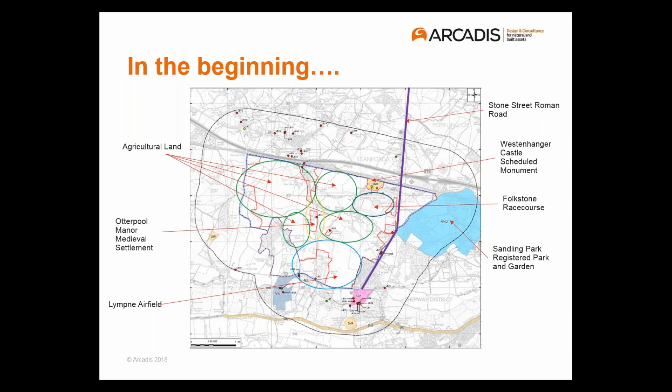So at the early stages of the project, one of our key aims was to reduce the risk of the project from the archaeological resource. But we also knew that the archaeological resource at this site had huge potential to add value to the project. From the outset, we knew that archaeology was going to be a major part of the master planning and design of the site and would be a key topic in the planning application.

The development was going to interact with some nationally significant heritage assets, such as the castle, and we also knew that there was a lot of potential for large amounts of as yet undiscovered archaeology to be present. All of these factors meant that there were both risks and opportunities from archaeology on this project, which presented both constraints to development, but also opportunities to add value to the project.

Some of the key risks and opportunities could be dealt with through design. However, the unknown archaeological potential could have posed a significant risk during the construction phase due to the potential lack of clarity around cost and programme that dealing with unknown quantities of archaeology can present. So as you can see from this slide, I've just pulled out some of the key risks and opportunities that we were talking about at the initial stages of the assessment.

Many of them were obviously associated around the castle, but we also had design risk associated with Lympne airfield and how much of the airfield would be available for development. We had a UXO risk there, significant amounts of unexploded ordnance in the area. Folkestone Racecourse, there was much discussion around whether it was even a heritage asset or modern disturbance, with differences of opinions. And obviously the unknown archaeology I've mentioned.

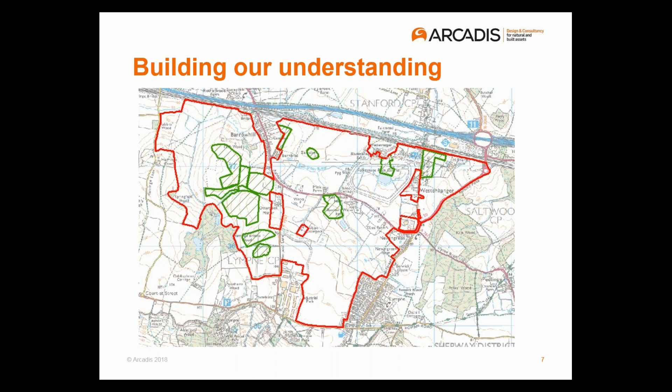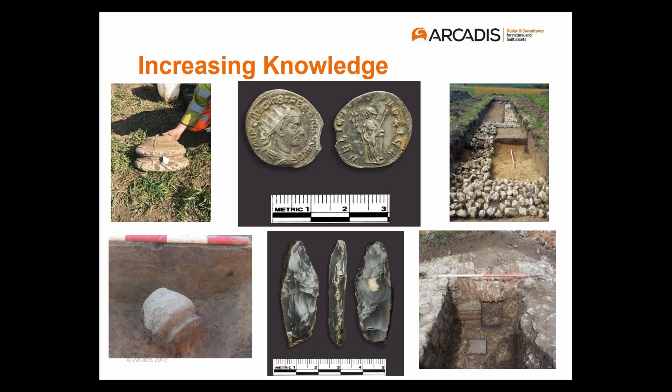So what have we found from the investigation so far? We found that the site was a rich historic landscape containing previously unknown archaeological remains. We have Mesolithic and Neolithic remains, including a possible causewayed enclosure. We have Bronze Age field systems. We have an early to mid Bronze Age barrow cemetery. We have early to late Iron Age enclosures and pits. We have late Iron Age and Roman field systems. We have a Roman villa with hypocausts, trackways, a possible malting oven, and evidence of glass furnacing. We have Roman farmsteads, part of the formal Tudor gardens to the castle, and a large number of landscape features associated with the castle, including the former deer park. We were actually able to trace the line of the park pale through historic mapping and LiDAR.

At this point, I just want to briefly touch on one of the feature types we've identified through our assessment work: the prehistoric barrows. At the beginning of the project, we knew there was one or possibly two barrows within the site. However, through the various assessment and investigation works we've conducted, we've identified a large number of other barrows.

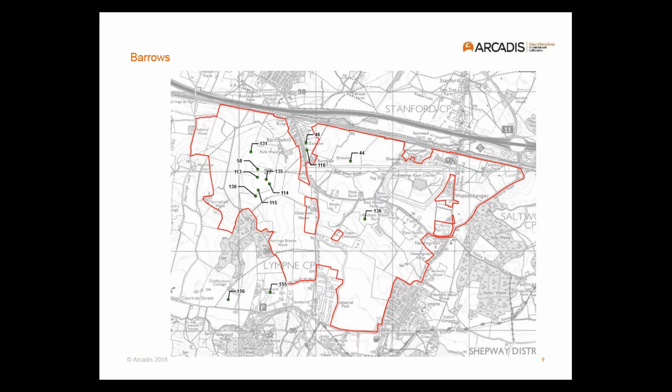This has significantly added to the understanding of the distribution of prehistoric funerary monuments in this part of Kent, but has also created potential further constraints for the Otterpool project. So a key focus of our work in relation to these archaeological features was to understand the preservation and significance of each barrow, so we could identify which ones needed to be preserved in situ and which ones could be mitigated by record.

So what have we done with all this information we've been collating? One of the ways we have added value to the project is by managing constraint through design. Here you can see some of the ways this has been done. The most significant of the prehistoric barrows have been preserved in situ.

We have maintained areas of open space around Otterpool Manor, which contains a small cluster of listed buildings and is also a former medieval settlement. We have retained some of the key airfield features, such as the Pickett Hamilton Fort and the pillboxes. We've placed areas of open space in the location of the villa, so we can preserve that in situ. The line of Stone Street Roman Road has been preserved and a new high street constructed to the west to divert traffic away from the line of the Roman road.

And we have incorporated a park into the master plan located just to the south of the castle, and more about that in a second. Understanding of this design mitigation and the drivers for it as the project moves forward into the construction phase will be important, as it may have implications for construction techniques in the preservation in situ areas.

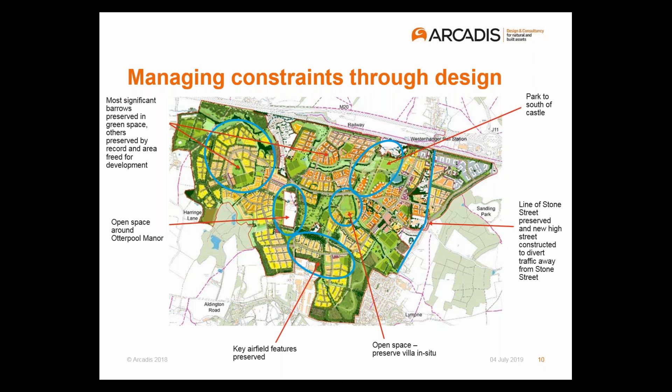One of the key topics that has featured through the life of the Otterpool Park project is Westenhanger Castle. Impacts from the development on the castle and risks to the project from the castle have been the focus of many discussions, and we've produced a number of detailed assessments focusing on understanding the significance of this asset and managing the risk in both directions, both to and from the project.

One key piece of design that has come out of our assessment sprang from the work we did on defining the setting of the castle and identifying previously lost features.

The area to the south of the castle, which has been agricultural land since the post-medieval period and then latterly occupied by Folkestone Racecourse, was identified through our work as being part of the former deer park associated with the castle. Our assessments were able to identify the former Park Pale, as I've previously mentioned, and also the lost formal Tudor gardens, which are located immediately to the south of the castle buildings. And we also rediscovered the southern access track to the castle.

Working with the design team, we've incorporated these features into the master plan. The area to the south of the castle will become a public park. There will be a new formal garden in the location of the Tudor Gardens, and the southern access track will be reinstated, which will reintroduce the original formal access to the castle.

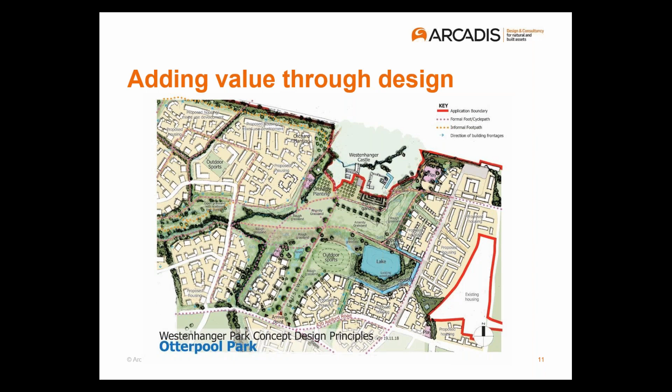So this project has shown what a rich landscape the Otterpool site is, with a long history of human activity, covers a large area and already has several distinct heritage identities within it. And through our work, we are working to reference that and to create a place that doesn't just feel dropped into the landscape, but references the past in a way that people can appreciate and engage with.

I've talked about the park by the castle, which will be a town park. There will be a new high street and town centres near the station, which are going to form part of several distinct neighbourhoods. Because the site will be built out in phases over 30 years, each neighbourhood needs to have its own distinct identity but still be interconnected.

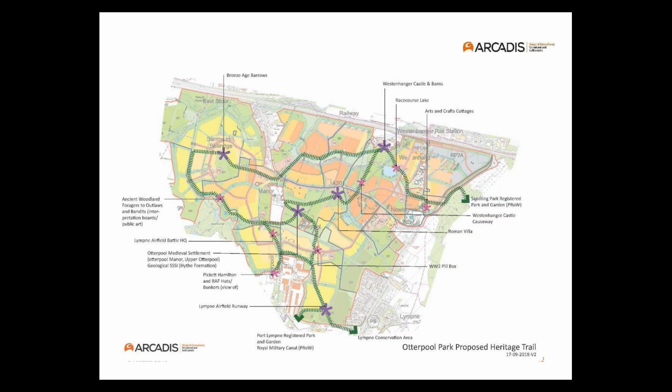Hopefully what I have demonstrated with this case study is the benefits of early assessment and investigation on a project. As I mentioned, we've been working on this project since 2016. We're currently in the stage of simultaneously submitting a planning application and continuing the archaeological trial trench evaluation.

Because of this early assessment investigation, we have been able to identify the most significant archaeology so it can be preserved in situ and incorporated into the design. We have achieved good clarity on the archaeological potential of the site, which means a clear mitigation strategy can be produced and used when letting construction contracts, hopefully fewer surprises at construction stage.

We have greater clarity on cost of the archaeological mitigation that's going to be required, and that gives us increased control over the programme as well. The archaeology is making a positive contribution to the master plan, creating a sense of place and community buy-in, and that increased understanding of the archaeological resource has led to more enhancement opportunities for the development, such as the formal gardens and the heritage trail.

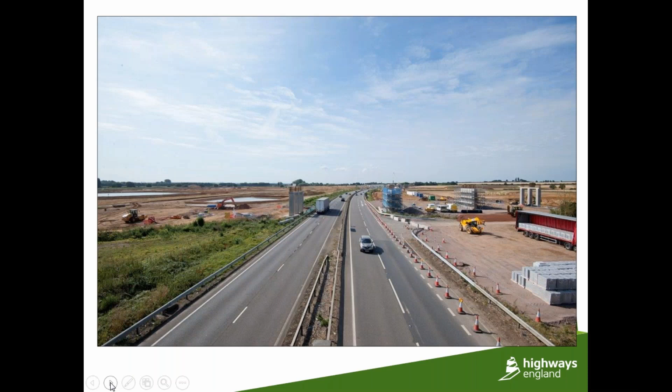There's a quick look at the road. I've not got any maps today, but yeah, if you know Cambridge to Huntingdon, this is the actual road. Very flat landscape, very wet. Now, one of our managers who probably had a bit of time on his hands worked out that actually we excavated the equivalent of 7 Vatican cities. So that gives you a bit of an idea of the scale of this project.

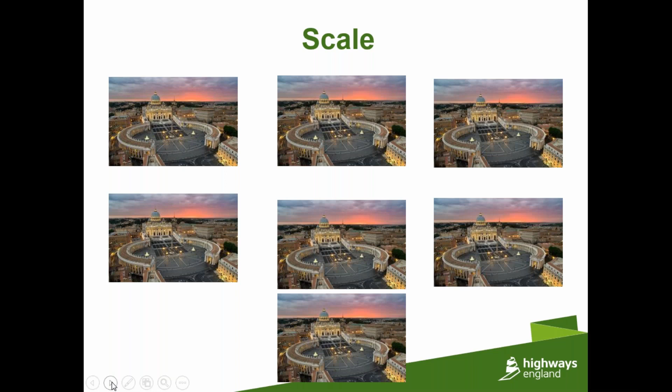I'm not going to go into detail on what we actually found. I'm going to concentrate more on the learnings, but we had everything. This was actually quite unusual - we don't usually pick up Paleolithic stuff, but we did on this. In fact, it was on the news quite a lot about woolly rhinoceroses and woolly mammoths. We had everything from that. Lots of henges, lots of barrows, as you'd probably expect. Lots of Roman and Iron Age, dozens and dozens of sites like this, with some Iron Age, some Roman, some both.

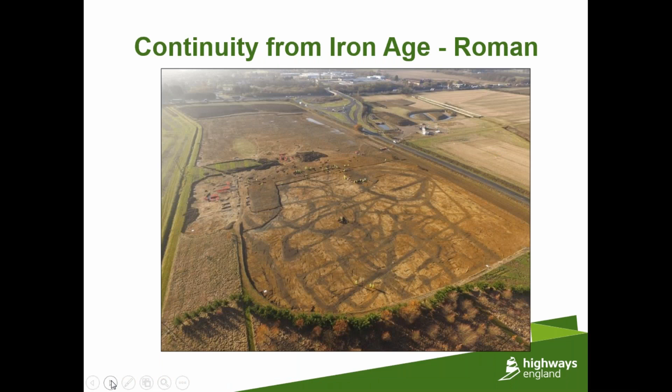Probably the biggest unexpected discovery in terms of what we actually found was the Saxon settlements. We found 2 or 3 Saxon settlements and a medieval deserted village, which didn't show up really in any geophysics or any trenching. So that was the biggest surprise of the whole lot.

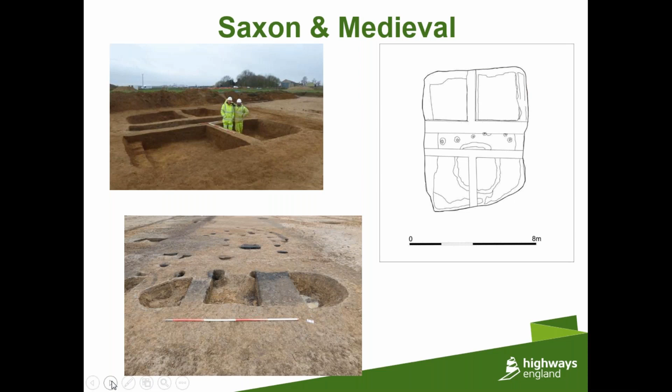Just to give you an idea of the scale, we investigated about 800 hectares in terms of geophysics and trenching, and ended up excavating about 28% of that - 228 hectares eventually fully excavated. You can see the scale of that: 65,000 person days, almost 5 years of watching machines.

We had about 40 sites in total. On average we had about 12 sites running at any one time, but at its peak we had 17 sites running in parallel. On average we probably had about 150 on site, but at its peak 250, with another 50 off site - so about 300 staff on the project. The largest single team on one site was 136 staff, and one of those sites ran for 83 weeks. So you can see the scale of the exercise.

In terms of data, these projects are massive on data. It's a real matter for projects like this to be managing that: 92,000 contexts, 1,600 plans, 15,000 sections, so you get a feel for how much data we're actually generating and producing. And 17,000 buckets of environmental samples, which we'll come on to later.

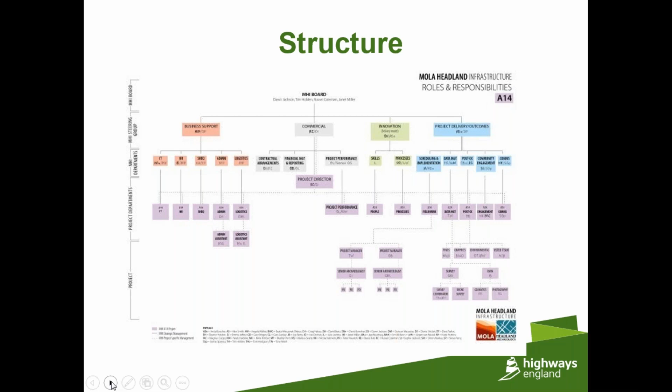A client, as I mentioned before, actually there were 4 different clients building 4 different roads, so that was an issue in itself, and joining it all up was quite a struggle. They eventually brought in Steve Sherlock, a consultant, to help with that, and he did a great job in helping us work with them.

There was no real program in those early days, only a 3-week look ahead. So again, very difficult to plan your resources when you really don't know what's happening other than 3 weeks ahead.

Another issue we had was the priorities on the scheme. The enabling works were very keen to get haul roads in, piling platforms and compounds. And that often meant part excavating sites, not in their entirety, because if we'd done the whole site, we would have fallen behind. So we ended up having to do parts of sites quite often in those early months.

And also as changing competing priorities, you had, was the priority the road line, or was it the haul roads, or was it the borrow pits, which are almost a bigger footprint than the road? Or was it the utility diversion? So often competing priorities had us moving from one to the other.

And really the client had never dealt with archaeology on this sort of scale. Often this sort of work is done before they get on. And so there was a real learning curve for them as well.

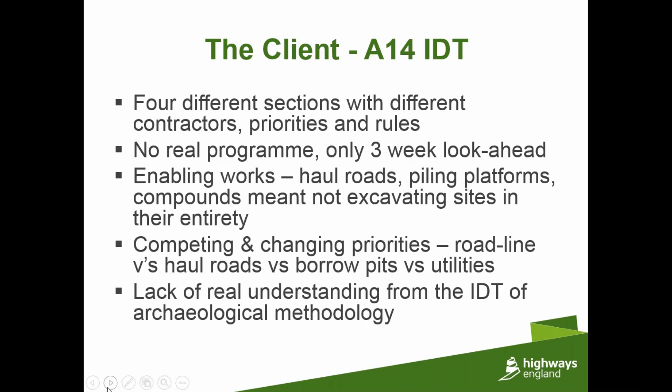Just another quick look at the scale and resourcing. We had about 30 on the initial trenching. We then started mitigation with about 50, and then we were immediately required to scale up to 180, and then it became up to 300. So it was quite a push.

There was a massive kind of recruitment drive. There were other big schemes going on at the same time as us. For example, East Anglia 1 was not far away. Northstowe, one of the big new garden towns similar to what Jenny was talking about. And Lincoln Bypass was going on at the same time. So there were a lot of contractors all recruiting at the same time. And that actually did drive up wages, which is probably a good thing.

Inductions, when you're trying to get that many people onto site quickly, inductions become a real issue, booking them in, organising them, finding drivers, making sure the supervisors all got the right health and safety tickets, SSSTS tickets.

Some things we did to try and keep our resources up, so basically trying to recruit people but also retain them. So we had finder's fees for finding new staff. We had a loyalty bonus which the client backed us on, so if you stayed till the end you got a bonus rather than left early.

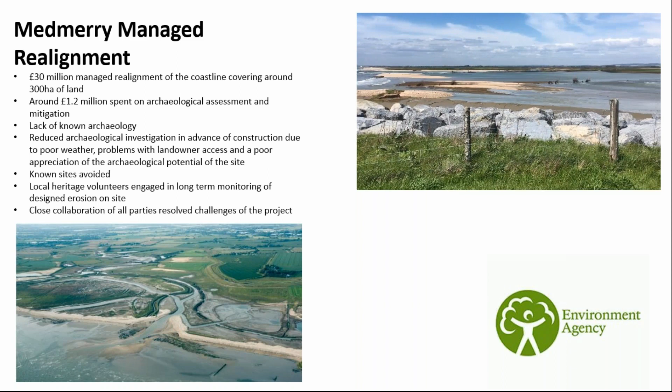The first bit I'm going to talk about is the managed realignment scheme at Medmerry. This was a project that took place between 2010 and 2013, involving the managed realignment of the coast at Medmerry, immediately to the west of Selsey Bill, just south of Chichester. The aim was to create compensatory habitat to allow the coast to adapt for intertidal habitat being lost due to coastal squeeze.

Coastal squeeze is: if you imagine our sea levels are rising, the intertidal zone ideally moves gradually inland as sea levels rise. But in some locations we've got hard coastal defences in place, and that means that as sea level rises, that intertidal strip where you get wading birds and special habitat surviving gets squeezed by the hard defence and eventually lost. So we've got a legal requirement to compensate that by creating new intertidal habitats.

Both of the projects I'm going to talk about relate to compensating the effects of coastal squeeze. The first one, as I say, is Medmerry, which you can see on the little movie rolling at the top there - that's the project we're talking about, with an aerial view in the bottom left corner.

The scheme was creating a landscape which would regularly flood due to the tide, and we commissioned a program of archaeological investigation to try and understand the impact of that work. We knew we would have about 60 hectares of landscape impacted by intrusive groundworks, and we would likely require 2 years of construction to put this structure in place.

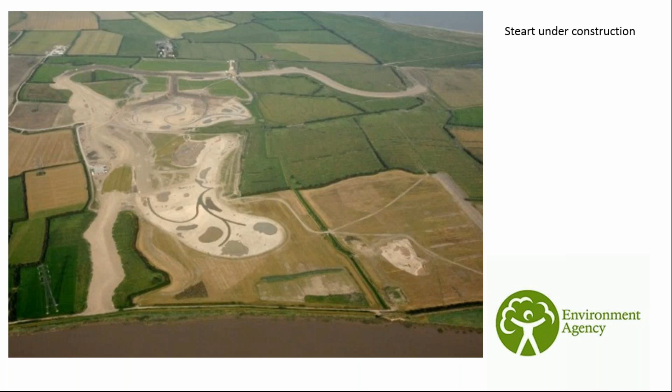One of the key messages is not to be afraid of those difficult conversations with the project team about spending money at the very beginning to gather this baseline information. I found it's much better to have a difficult conversation at the start of a scheme when you're designing, rather than at the very end when you're running out of money. That was an important lesson for us.

A good example of this is a slide showing the peninsula - you can see 3 or 4 parallel lines running across its length. One of the problems we had was that most of the site was under grassland, so field walking wasn't possible, which was one of the techniques we wanted to use to identify artifact scatters, because geophysics can be unreliable in these sorts of landscapes.

So rather than just not doing the field walking, we got the local farmer to plough our field walking transects. There's a cost to this, but in the scheme of things it can save you hundreds of thousands of pounds. We just need to be proactive in making sure that sort of thing happens.

That's us ploughing transects for field walking, and then we did geophysics, and followed the normal trial trenching approach, which led to open air excavation of the known sites.

We really worked to absolutely minimise observation during construction. All of our work tends to be designed around separating archaeological work from the construction process, because the most expensive archaeology is the archaeology that happens when all the plant stands still. We managed to completely avoid that situation.

It's also safer - with great big pieces of plant moving around creating these big channels, we don't want archaeologists moving around between them. By doing the archaeology separately from construction, you get a better level of information and reduce the risk of people being injured or worse. We also made sure all phases of archaeological work were carefully defined within the construction programme for the scheme.

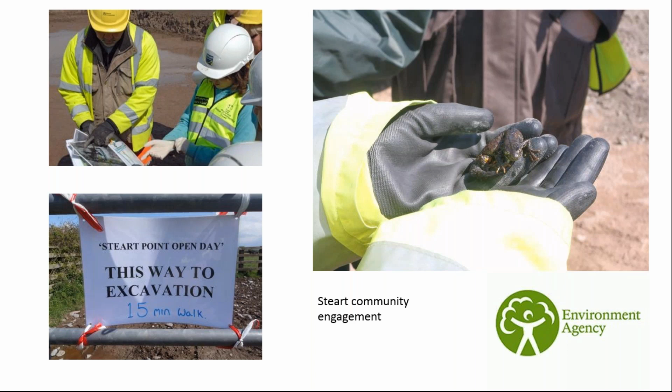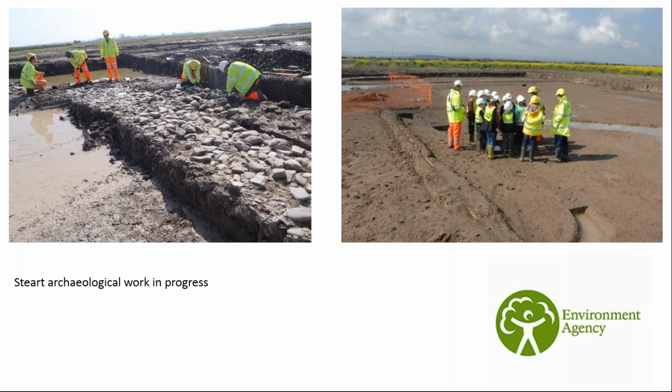I think originally when we designed the breach location for the scheme, to the point at which the creek network joined the River Parrett, that was in the same location as a known wreck sitting in the intertidal zone, which was picked up as part of the desk-based assessment. You could see it at low tide, the remains of the boat. So we basically redesigned the breach and moved it away from the structure so that, although we identified its presence, we didn't then have to archaeologically excavate it.

My takeaway lesson from both projects is about confidence, and I think we as archaeologists need to be confident in the delivery of our advice to project teams. Similarly, project teams need to feel confident that we're providing professional, technically informed advice designed to support a mutually successful project outcome. So thank you for listening.